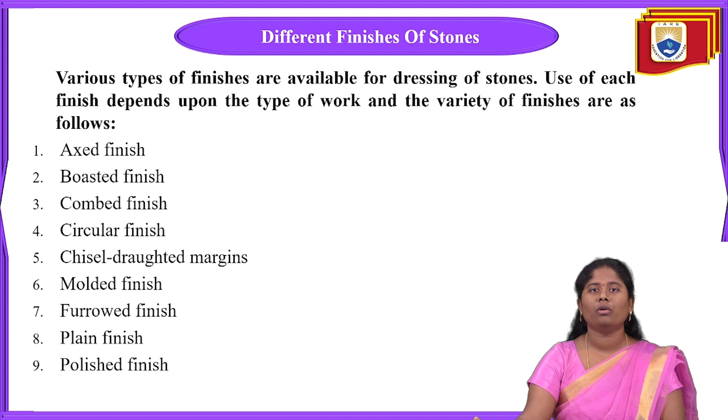In the last class, we discussed types of dressing of stones. Today we are going to learn about different finishes of stones. After completing the dressing of stones, that is, after taking the stones from quarrying, we dress the stones according to the construction purpose. Various types of finishes are available for dressing stones, and the use of these finishes mainly depends upon the type of work. Some varieties include axed finish, boasted finish, combed finish, circular finish, and overall there are 18 types of finishes, used for different purposes in construction.

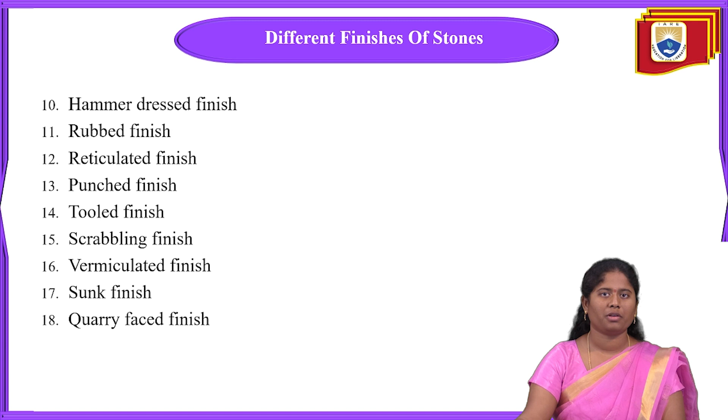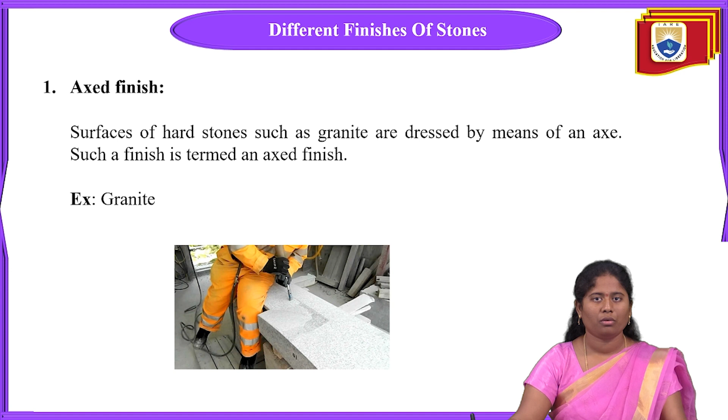Next, hammer dressed finish. In this type of finish, stones are made roughly square or rectangular by the use of Waller's hammer. After the dressing process is done, meaning after cutting and shaping, these finishes are known for the construction process where they are used. This Waller's hammer is very important because it can be used to shape stones into rectangular or square shapes.

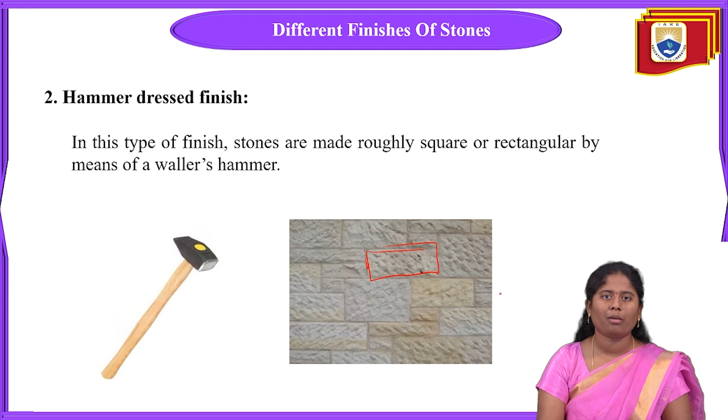You can see the picture of Waller's hammer, and the next picture shows how the stone looks after finishing is done. By using the axe and chisels, we cut the stones roughly square or roughly rectangular, so the surface of the stone remains rough, not smooth, and some grooves will also be present. In the second picture, you can see the stone dressed by the hammer dressed finish, where the stones are roughly squared or roughly rectangular, using only Waller's hammer. That is the hammer dressed finish.

Next one is rubbed finish. This type of finish is obtained by rubbing the surface with a piece of stone or with the help of suitable machines. Water and sand can be used freely to speed up the rubbing process. After taking the stone from the quarrying process, we rub the stone surface with the help of a piece of stone or a suitable machine.

A suitable machine is like a polishing machine, which rubs the stone, and at first the surface remains rough. But after rubbing the surface with the suitable machine, we use materials like sand and water freely to speed up the rubbing process. By rubbing, we neatly get the stone into a specific shape. That is the rubbed finish, using water and sand to speed up the process.

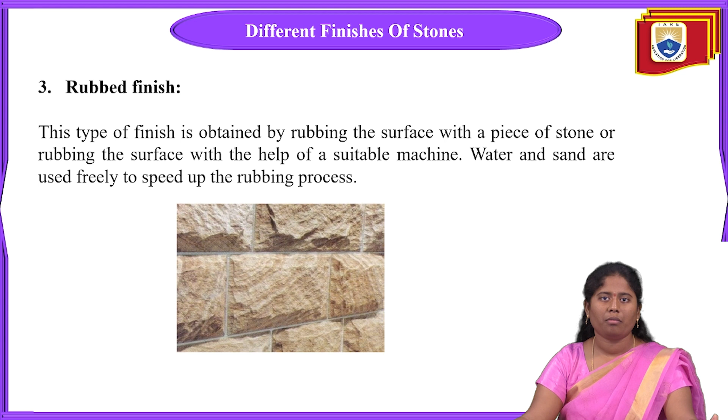Next, plain finish. In this finish, the surface of the stone is made approximately smooth with the help of the saw and chisel. We give shape to the stone using tools like chisel, hammer and saw. After taking the stones, we cut them into a specific shape accordingly, depending on where the stone will be used.

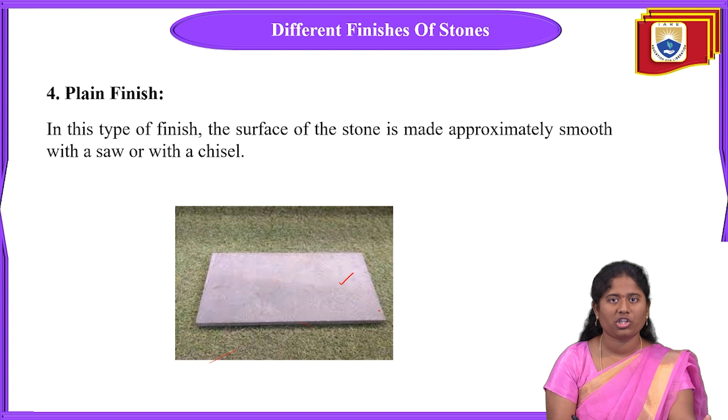Next one, polished finish. In this polished finish, we use stones like marble pellets and granites that can be polished by hand or by machine. On the stone surface, depressions are made by using a punch, and the stone surface takes the form of a series of hollows and ridges, meaning some up and down pattern.

We make these shapes on stone surfaces like marble pellets and granites. We polish it by hand or by using polishing machines, or using a small machine that can be used by hand itself. On that stone surface we are going to make the depressions using a punch.

In this finish, first of all we polish the stones using a hand polishing machine or a machine polishing machine. After polishing, we make depressions on the stone surface using the punch.

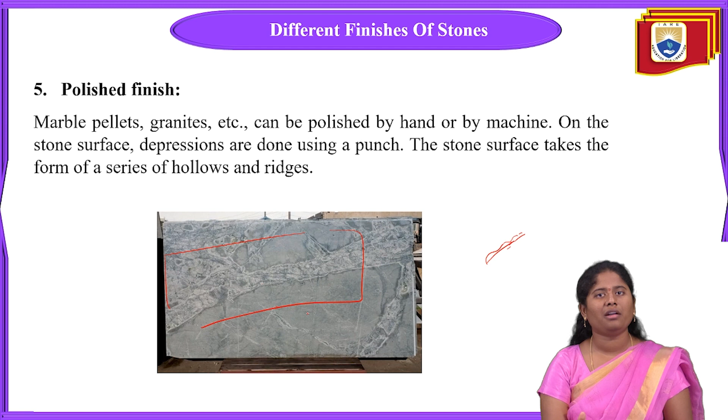First step, we polish the granite or marble pellet stone using hand polishing machines or machine polishing only. After that we make depressions on the stone surface using the punch, and the stone surface takes the form of a series of hollows and ridges.

Next one, boasted or drafted finish. In this finish a boaster is used to make non-continuous parallel marks on the stone surface. Non-continuous means the parallel lines are not continuous when viewed.

This boaster is nothing but a chisel which has an edge of width about 60 mm, or about 6 centimeters. So the boaster is a chisel with an edge width of about 6 centimeters, and these lines can be horizontal, vertical, or inclined marks.

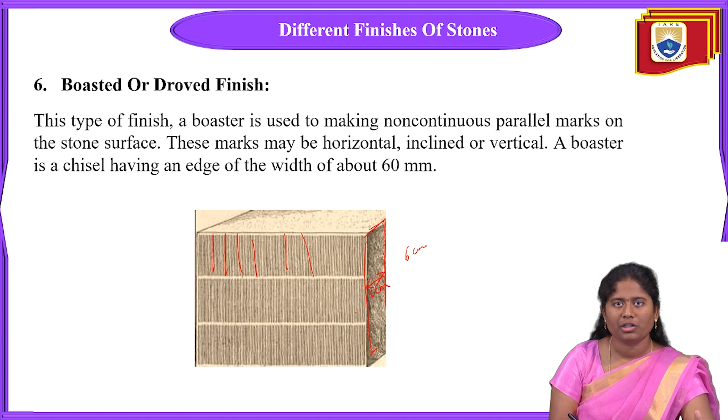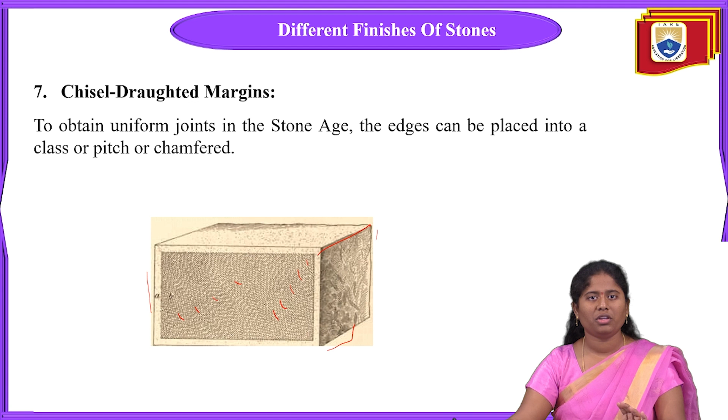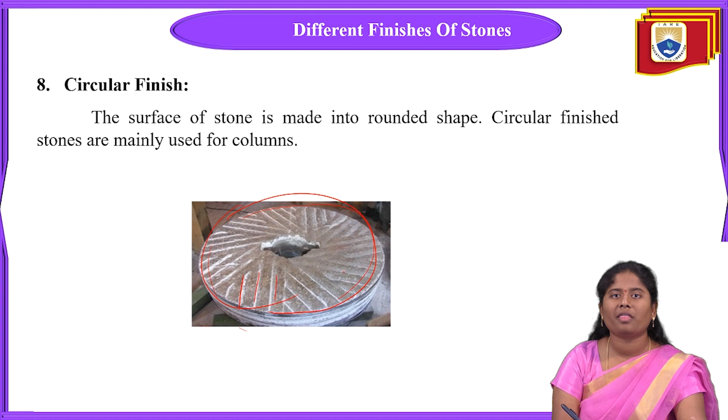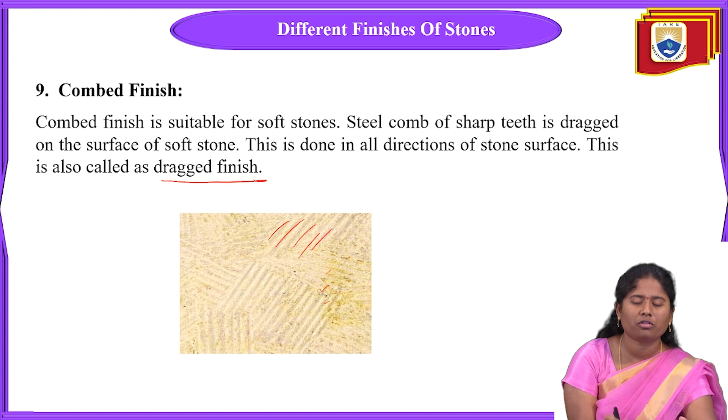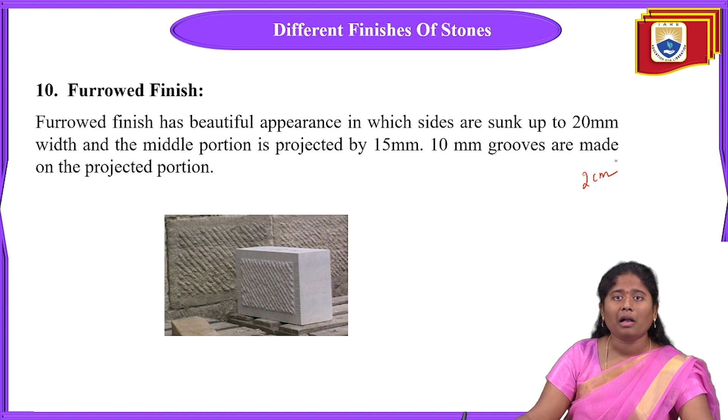Here, these are the sides. If we consider this as the stone, this side part is there, and this side part is sunk up to 20 mm, or 2 cm width. The middle portion overall will be projected by 15 mm, or 1.5 centimeters. We have a projection in the middle portion, and also 10 mm grooves are made on the projected portion.

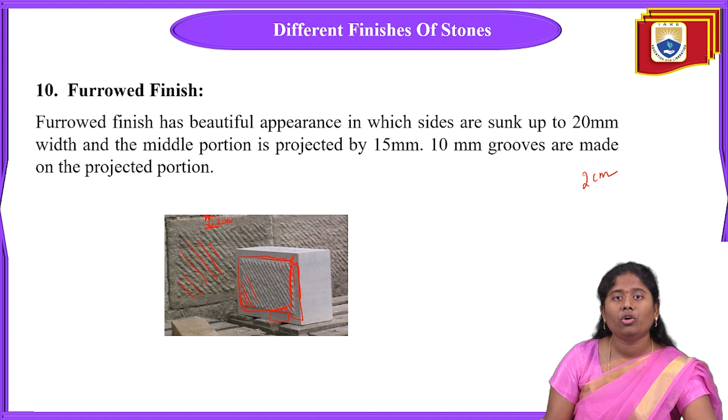You can see these grooves now, and here this is the stone. In this stone, you can see this width now, and after all, the sides are sunk up to 2 centimeters here. The sides are sunk up to 2 centimeter width, and this middle portion is projected up to 15 mm here.

10 mm grooves can be made on the projected portion. These grooves are made on the projected portion only.

This furrowed finish has a beautiful appearance, but grooves will also be on the projected portion, having 10 mm width.

The middle portion is projected by 15 mm, and the sides are sunk up to 20 mm width.

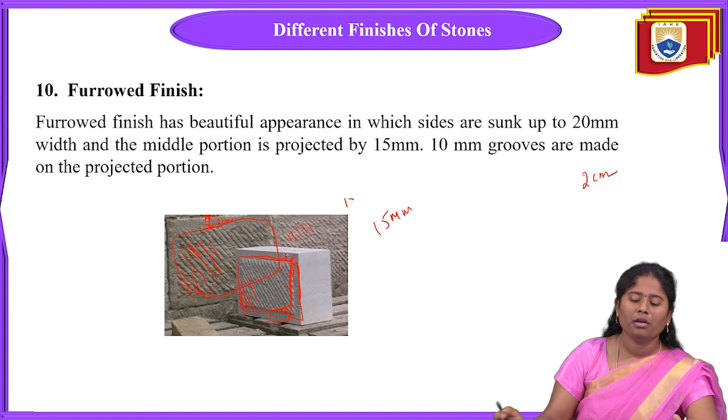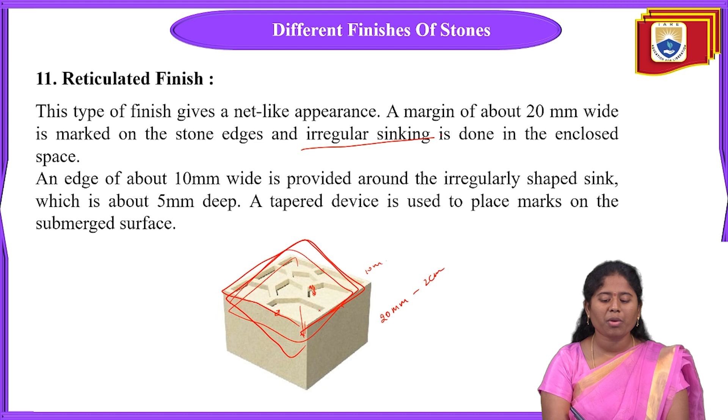This 10 mm width can be provided around this irregular shaped sinking, and this overall depth is about 5 mm.

This depth will be in the irregular shaped sinking, and here we are going to use a tapered device that can be used to place marks on the submerged surface.

Here we are going to use the tapered device that can be used to place marks on this submerged surface.

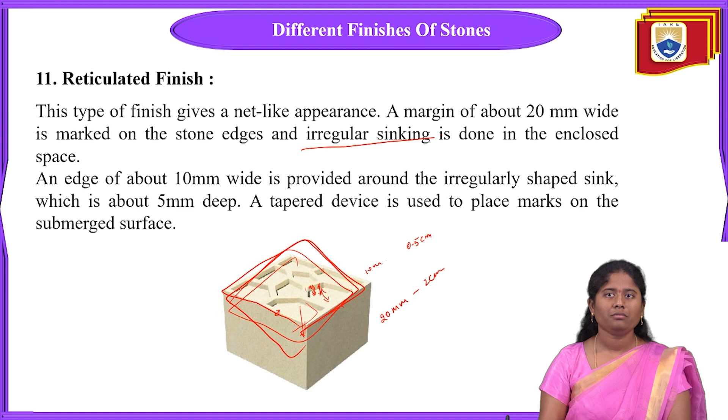Coming to the next one, the punched finish. Here we are going to obtain these stones by punching the stone.

We use a machine which depresses the surface of the stone and also creates hollows and ridges on the surface of the stone. After taking the stone, a punching machine is used.

Using the punching machine, we punch the stone, meaning the punching is given using the machine.

The purpose of using this punching machine is to depress the surface of the stone. After depressing the surface of the stone, we create hollows, ridges, etc.

These hollows, ridges, etc. are created on the surface of the stone.

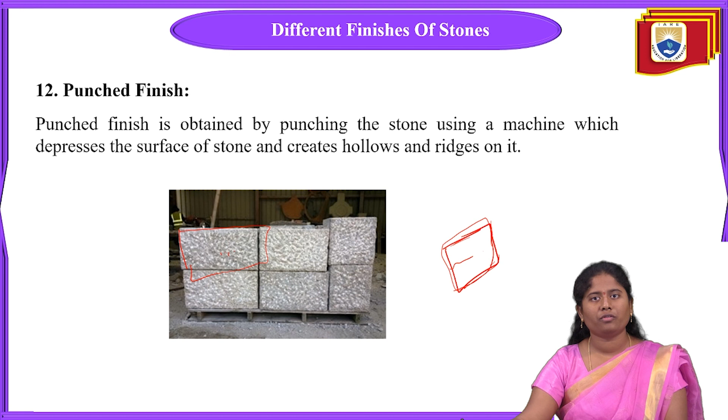By punching the stone using a machine, we get these hollows and ridges on the surface of the stone. That's why it is called the punched stone.

Coming to the next one, the tooled surface, which is a classic finish. Here we have parallel continuous marks, which may be horizontal, vertical or inclined.

This overall marking can be done by the chisel. We use tools like chisel, hammer, etc. for some purposes, and here we use the chisel for the purpose of this marking.

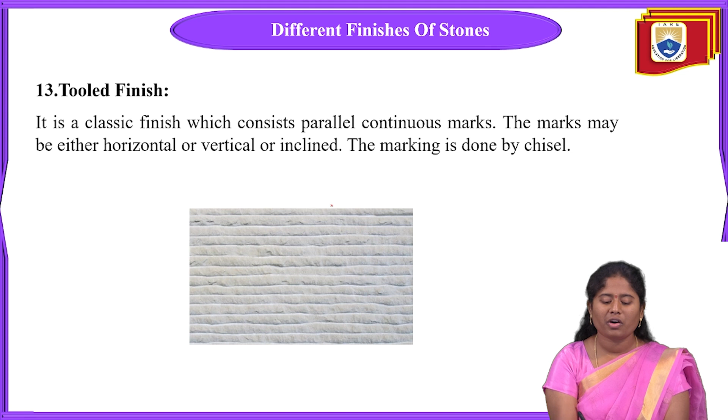Here you can observe the marking here, done by the chisels. In this tooled finish, by using tools like chisel, we create this marking on the stone surface.

We use that chisel for the purpose of marking on the stone surface.

These marks have parallel, continuous marks, and these marks can be horizontal, vertical, or also inclined.

In this picture you can see horizontal continuous marks, and each mark will have a uniform width.

Up to some width, we give these continuous marks to the stone surface using this tool like chisel. These marks can be horizontal, vertical or also inclined.

In some finishes we have a horizontal pattern, in some cases vertical or inclined. In this picture, horizontal continuous marks are shown. We use a chisel tool, that's why this finish is called the tooled finish.

And the next one is the scrabbling finish. In this scrabbling finish, the overall stone surface will be rough only.

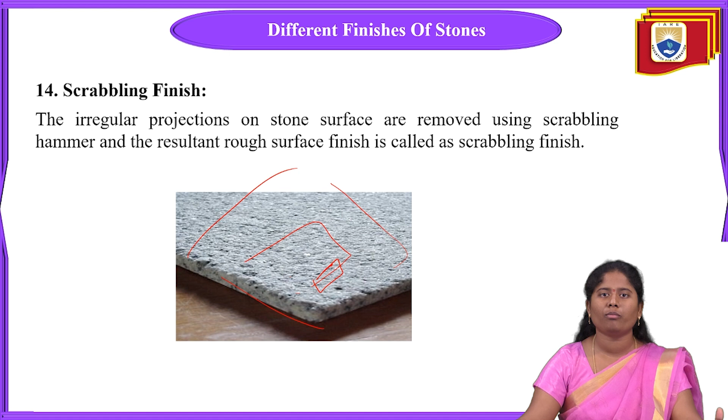You can observe this sinking part, it will be more curved, like a worm-eaten appearance. This is exactly similar to the reticulated finish, where straight lines will be there in the sinking case. But here, in the sinking case, we have curved lines, and it looks just like the worm-eaten appearance.

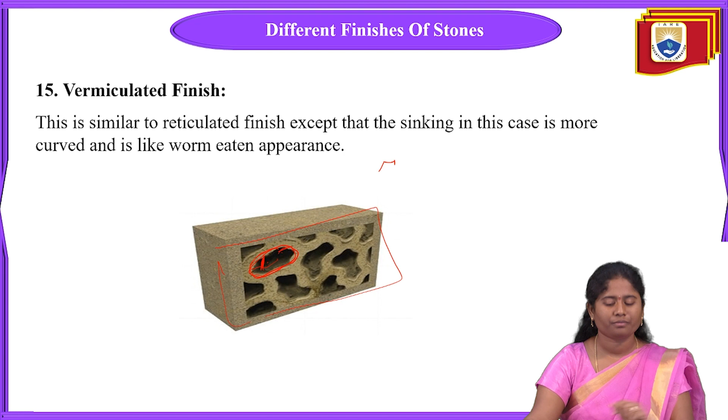If this is your stone surface, we are going to depress the original surface with wide grooves. Wide groove marks and also inclined surfaces we are going to give in this sunk surface, on the original surface of the stone only.

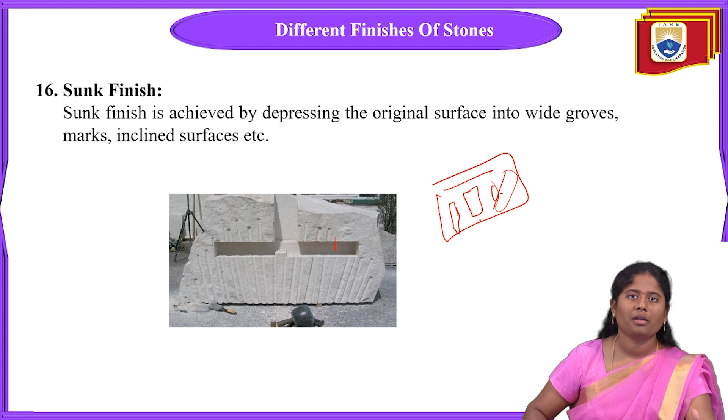Next one, quarry faced finish. In this quarry faced finish, the stones will be having a smooth surface, and this does not require any dressing. Almost in all the other finishes, we do the dressing process, but for this quarry faced finish, it is not required, because these stones are almost having a smooth surface only.

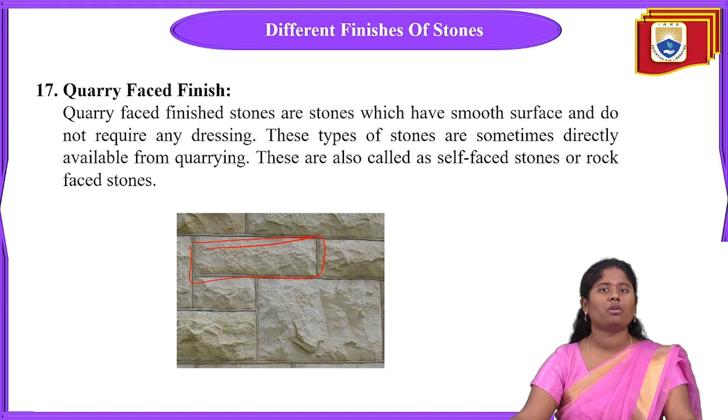These stones can be directly available from the quarrying process itself, without any cutting or dressing process. That's why this is also called self-faced or rock-faced stones. The overall surface of the stone will be smoothened, and it does not require any dressing process, since it can be directly obtained from quarrying. That's why these are called self-faced or rock-faced finishes.

And next one, the last one, is molded finish. In this molded finish, by using some tools and machines, these stone surfaces can be molded into our desirable shapes. After giving the desirable shape, it can provide good appearance to the work. In construction, we can use this finish for different purposes, including aesthetic purposes.

It can be square shape, rectangular, or circular. If you want the stone in a specific shape, we give that desirable shape in this finish, which provides good appearance to the work. By using these machines and tools, stone surfaces can be molded into desired shapes, providing good appearance whether for construction or aesthetic purposes.

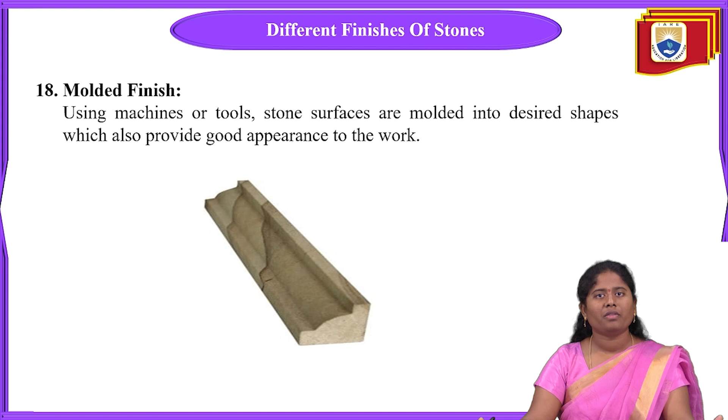Because it has good appearance for the work, the stone surface can be molded into desirable shapes by using tools. That is about the molded finish.